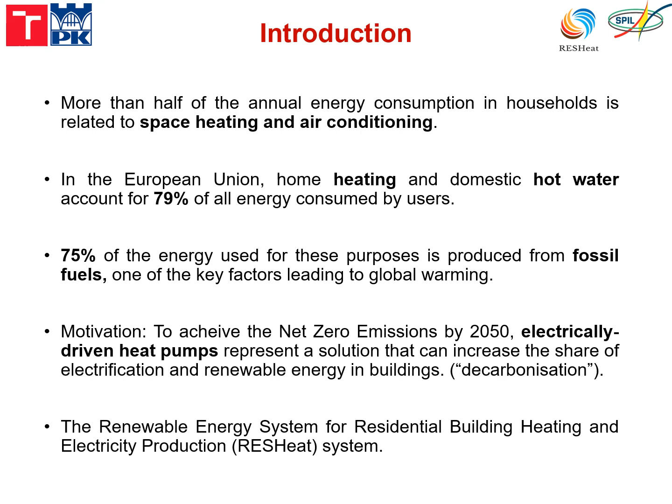To combat this, electrically driven heat pumps represent a solution that can increase the share of electrification and renewable energy in buildings, which is also the process of decarbonization. So, we propose a RESHeat system. The system is proposed by the collaboration of multiple institutions shown in the picture.

The goal of the project is to develop and apply a new, innovative, renewable energy system. The system aims to address at least 70% of the total annual energy demand in multi-family residential buildings. It could provide the real performance of innovative, renewable, and energy-efficient solutions, including heating, cooling, and domestic hot water.

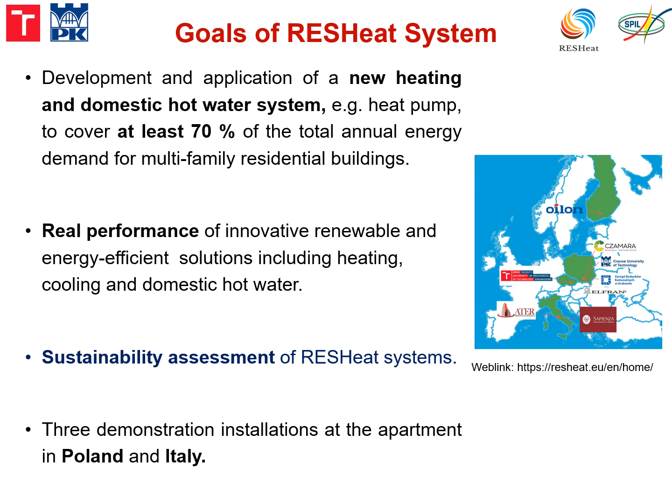In addition to efficiency, we take sustainability into account. Therefore, 3 demonstrations are built in Poland and Italy to test the effectiveness of the integrated systems. Before we tell the design of the system for Poland and Italy, we need to investigate the energy structure of Italy and Poland. The upper left figures show the electricity mix of Italy. It shows that fossil gas accounts for 51% of the electricity mix in 2022 in Italy.

The condition of Poland is even more critical as shown in the upper right figure. 79% of its electricity is from fossil fuels, placing it top of Europe. Additionally, 69% of the power is from coal. It shows the urgency to improve the utilization rate of renewable energy. Solar energy is an abundant and accessible source of renewable energy. The 2 countries show different levels of solar radiation.

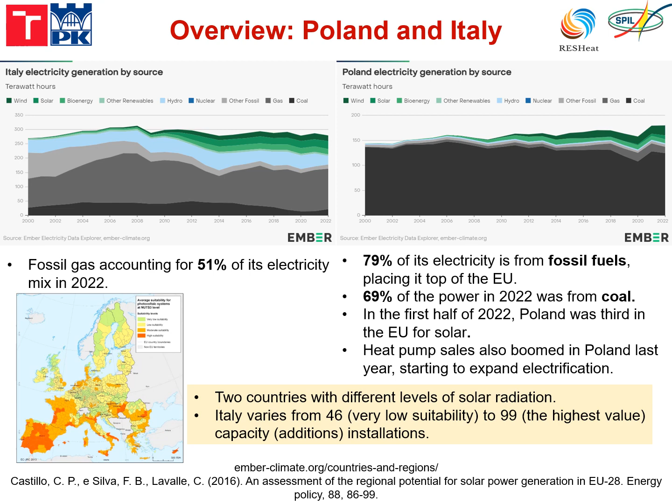In the first half of 2022, Poland was 3rd in Europe for solar capacity installations, and heat pump sales also boomed in Poland last year. In Italy, from the perspective of solar suitability, it varies from 46, very low suitability, to 99, the highest value, which depends on the seasons. Therefore, we firstly attempt to design and apply the demonstration in Poland.

The calculated technical potential of photovoltaics in Poland is 153 petajoules, which could cover 26% of Poland's electricity needs, while the current share is only about 4%, and the coal phase-out is scheduled for 2049, just behind the timeline to keep 1.5 degrees centigrade. For 2022 solar capacity additions, Poland is one of the top 5 countries in Europe.

The RESHeat system is proposed to make full use of renewable energy on combined cooling, heating, and power as shown in Figure 1. Solar energy is the main source of electricity and thermal energy. Photovoltaics and PVT panels are installed to generate electricity for the heat pump and other facilities, with the grid serving as backup power storage. The lower temperature thermal heating produced by PVT is stored in the borehole heat exchanger and will be reused during the winter to improve the coefficient of performance of the heat pump.

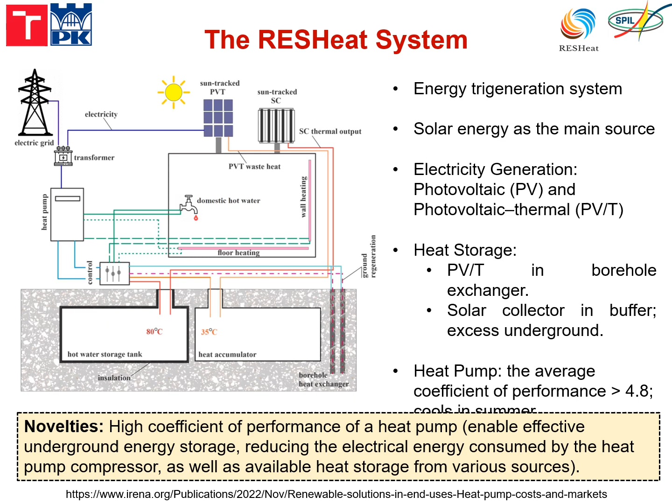As a new system, the RESHeat system is currently in the prototype demonstration. It's imperative to evaluate its environmental impact thoroughly to enable a fair assessment of its potential for emission reduction on a life cycle basis. The case study is adapted in a building in Limanowa, Poland, which consists of 9 multi-family apartments.

To evaluate the environmental impacts of the system, the OpenLCA software and the ecoinvent database are used. The assessment method utilized was ReCiPe 2016 midpoint, with a lifetime assumption of 25 years for the RESHeat system. The energy demands of this building are shown in the table.

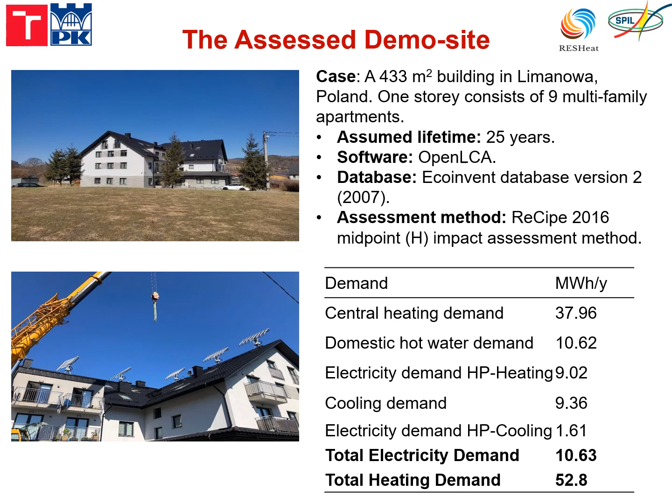In the life cycle assessment, the system boundary is defined as material, operation, and end-of-life stage. The functional unit is defined as the electricity, thermal, and cooling energy generated by the building energy system for 1 year. When considering the environmental impacts, the greenhouse gas emission and water footprint are analyzed.

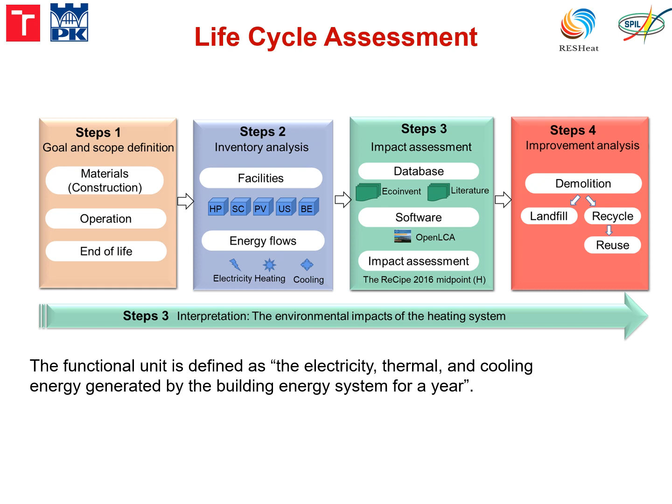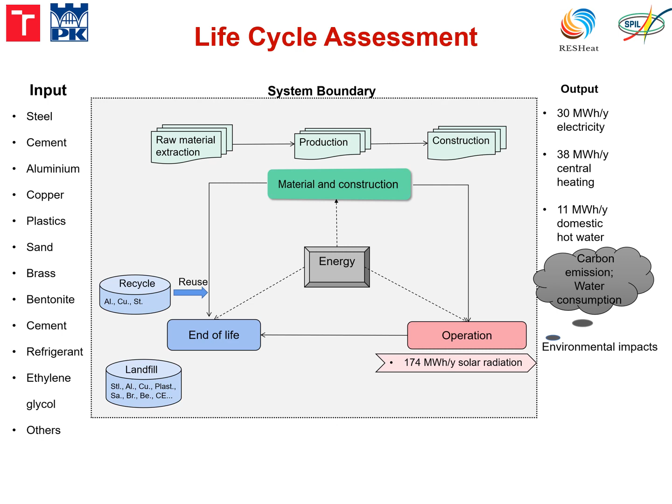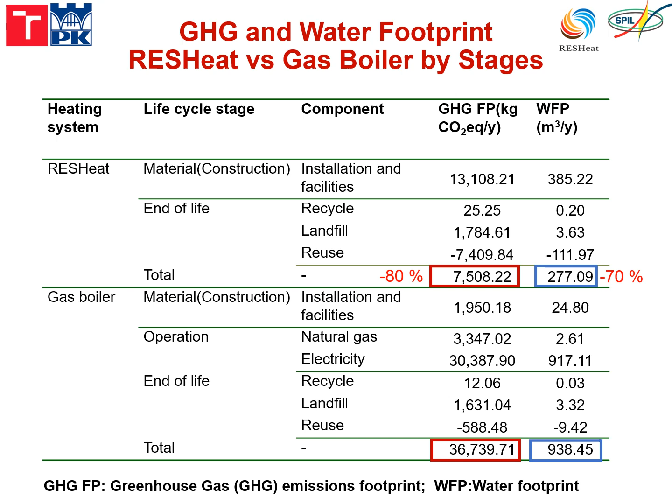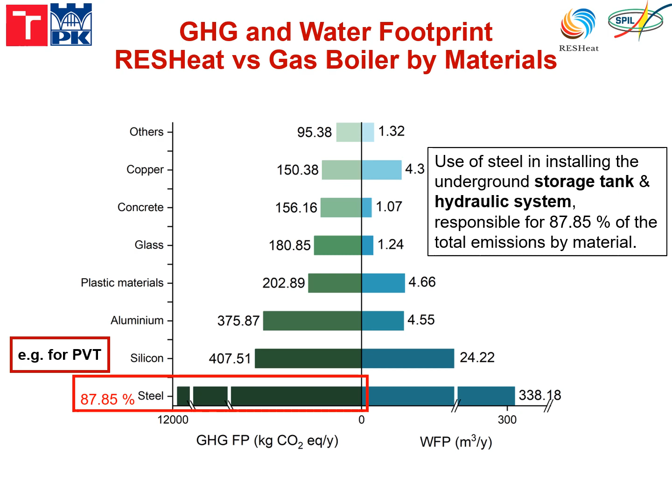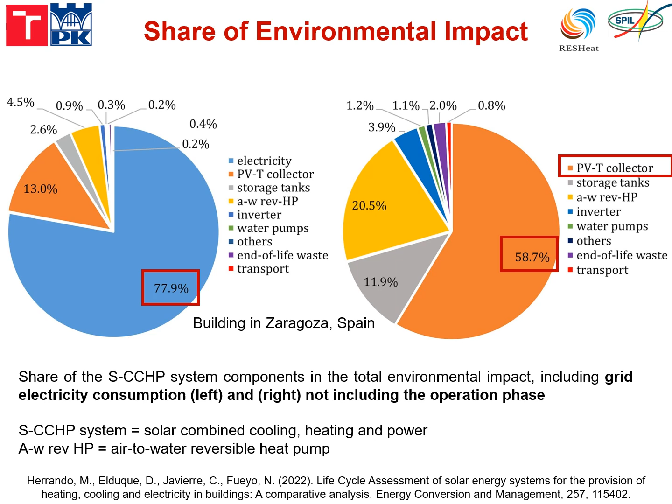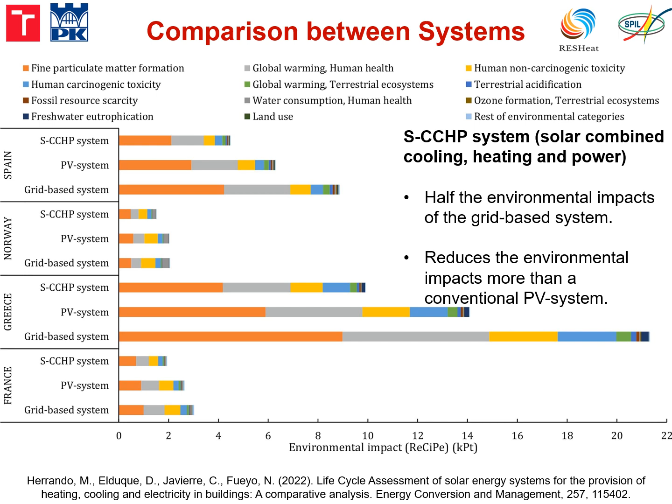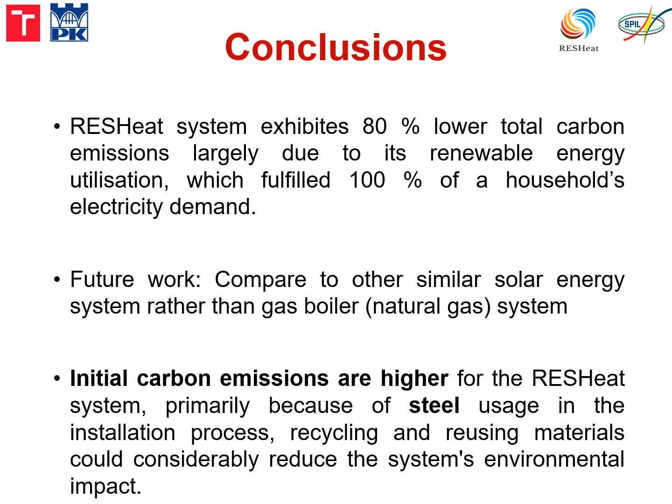In conclusion, the RESHeat system exhibited 80% lower total greenhouse gas emissions, largely due to its renewable energy utilization, which fulfilled 100% of a household's electricity demand. We will move forward to compare the RESHeat system to other similar solar energy systems in the future. And the initial carbon emissions are higher for the RESHeat system, primarily because of steel usage in the installation process. Recycling and reusing materials could reduce the system environmental impact considerably.